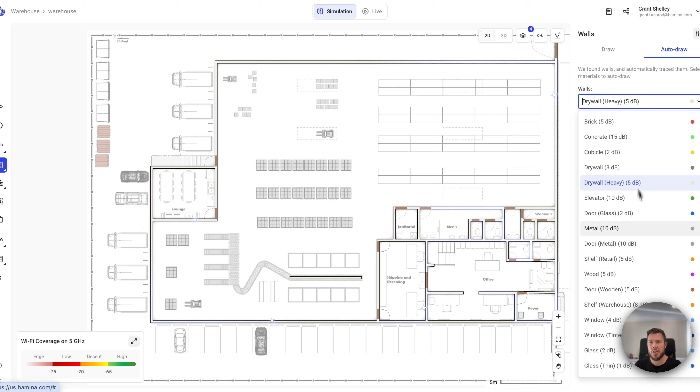The next thing it will do is Hamina will automatically scope the area. So you can go to your scope zones here, select that, and you'll see we've got an automatic scope found. In this case, it is the indoor area of the warehouse.

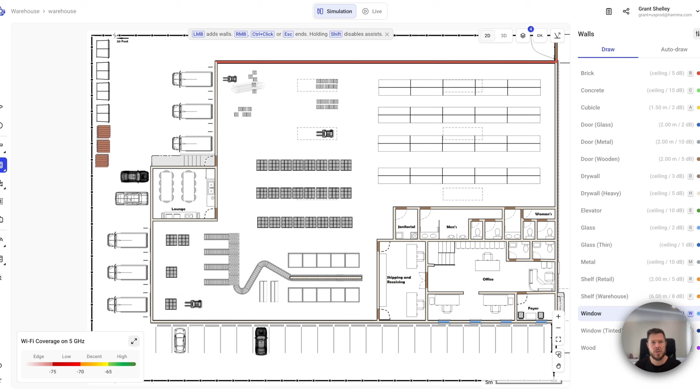And the last thing that Hamina will do is it will automatically draw in the walls for you. On the right-hand panel here, we've got walls and doors that have been auto-detected and the accompanying material that it's going to apply. You can change these materials if you want, or even delete them out entirely and draw the walls in yourself. But I'm going to let it automatically draw them here, and you can see that's done a pretty good job so far.

Now the next step we probably want to take is we want to draw in these warehouse racks. I'm not going to use a wall here, I'm going to use an attenuating object. So here I'm going to select the warehouse shelf, which is already in the tool, which is handy. I just left click and drag from one side to the other, kind of like drawing a big long rectangle.

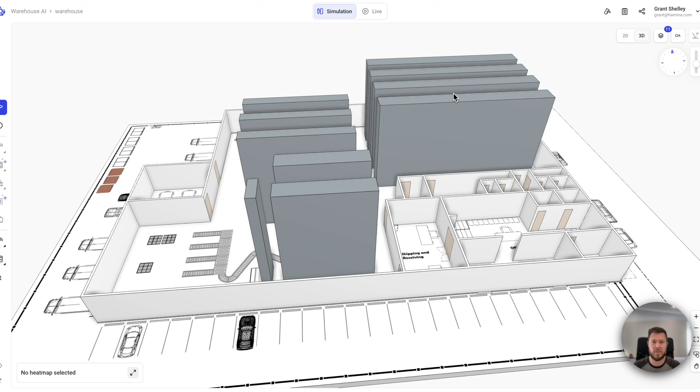And we're done. Now, since recording this video, we've already had some updates to the AI features within Hamina. So coming to a production push near you: if you select your environment to be warehouse and drag in a warehouse environment - and this will also work for retail and anything with shelving environments in there - Hamina will not only automatically draw in the walls, but it will also draw in the warehouse racks or the retail shelving as well now.

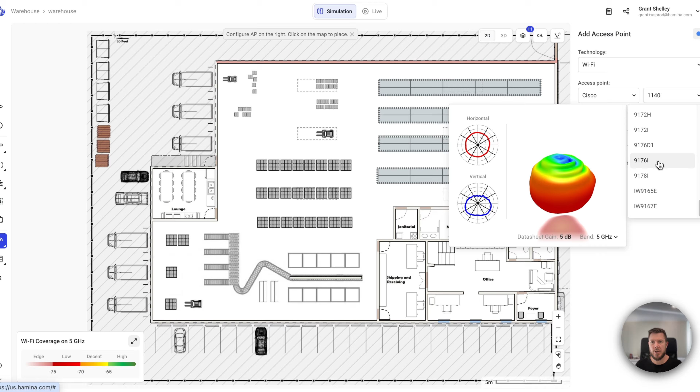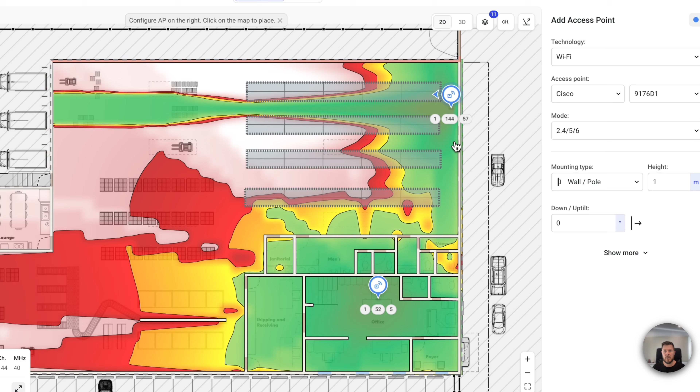So the next step is we need to place our access points. I'm going to select my access point and choose my vendor. In this case, I'm going to choose Cisco, and scroll down to use the 9176 because they've got an I model for internal Omni, which I'm going to use in the office environment, and they've got the D1, which is directional, for the warehouse environment. So I'm going to choose the internal Omni variant first, place that in the environment, and move it around to get an optimal placement.

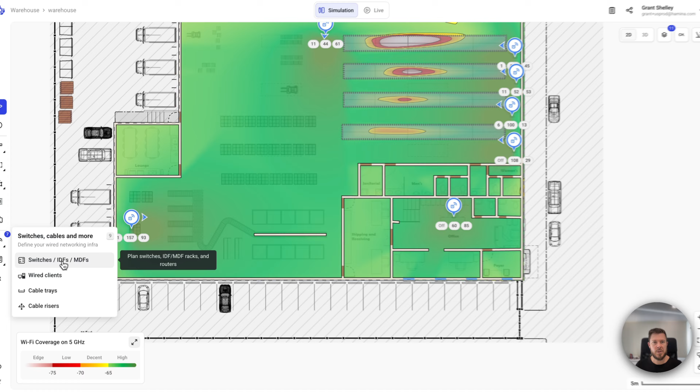Then I'm going to move back into my access point list, choose the 9176 directional version, and click these into the environment as well. For some of these antennas, I may need to face them the right way. That looks pretty good to me.

And now we're pretty much done. So the last thing I might do is go into the switching option here. I'm going to place a switch in the janitorial closet, select that switch, and make it a 24 port switch with a 750 watt power budget. And we are now done. So now we're sort of onto either the bill of materials or the reporting phase for stakeholders.